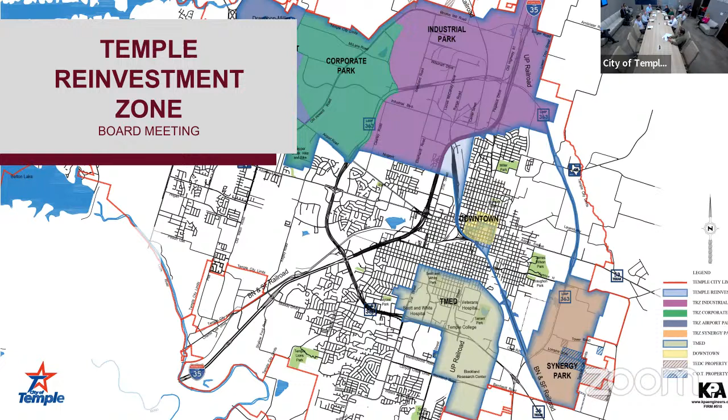So we have a PowerPoint presentation for 10 items. Just a little precursor: the financing chair, the project chair, and the chair worked with city staff over the last month, really working to get ready for this financing amendment. We reviewed all the projects, worked with our engineering staff, KPA, to work through all of the OPCs and any scope changes. I'm going to go through those—these are the 10 items.

For numbers 1 and 7, I'm going to have David from KPA give those presentations. On the outer loop change order, myself and Bob will be abstaining since we're working with one of the landowners there, just for conflict of interest. On number 7, the land for that detention pond is owned by the Bioscience District, and I believe Brian, myself, and Tyler will end up abstaining on that one too. So as you go through the agenda, you'll notice some lines dropped out so that we can abstain. On item number 1, we're going to have David talk about this change order.

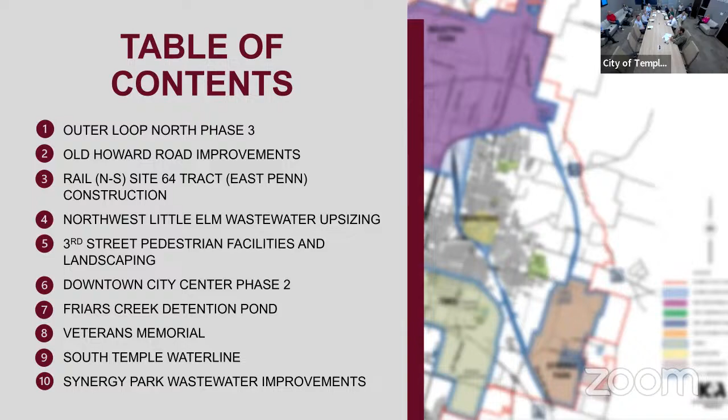Thank you, John. Good afternoon, everyone. I know most of you are pretty familiar with this project—it's been ongoing for a while. It's a signature project for the City of Temple: the closure of our outer loop on the north side, tying into I-35. We started this in 2013, so we're pushing 11 years now. One of the great things is we have a great contractor and we're moving very quickly. But with the North Industrial Park Master Plan we've done, there are some changes coming, reflected in the financing changes that Tracy has completed.

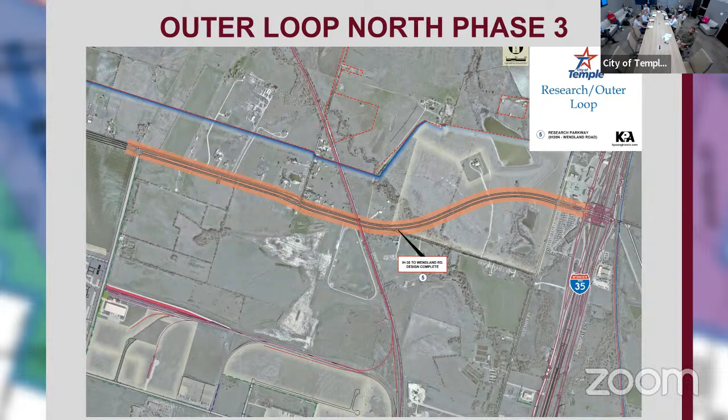If you recall, the North Industrial Park Master Plan has many elements to it, and this project was already designed and bid out prior to completing that master plan. This is going to sound like a lot of change order work, but keep in mind this is close to a $50 million project. You can see part of that North Industrial master plan up there, with a lot of retail space and improvements on areas that we own, so we will get increment off of that.

A few things we've done: we've developed a different turn lane and a two-way access around the BNSF on the east side of the road, as well as a full intersection at the future road heading north. Those have had some impacts to the projects that we will incorporate into this change order.

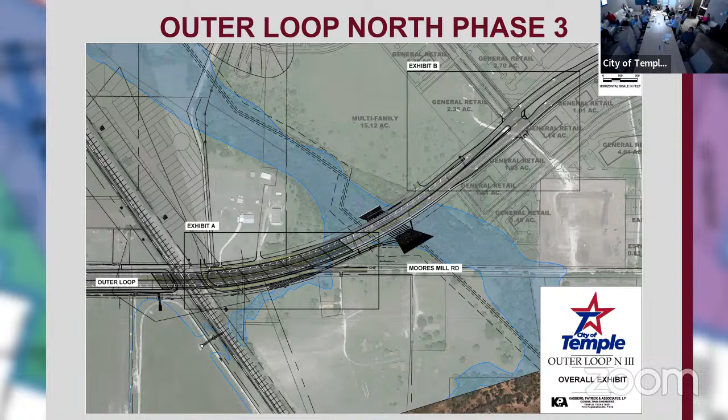That's a little closer look to it, where we can feed those areas and start to capture and build, and increment will be developed off of that.

It does affect the roadway section, the connection underneath the bridge around BNSF Railroad, and then we're going to tie back into Moores Mill Road because with that master plan we've developed some retail to the south. Things that we own and things we'll be able to get increment off of will feed our financing plan. A pretty large grading plan to the south as well, so we can get that more shovel ready, more attractive land, is also included within this change order.

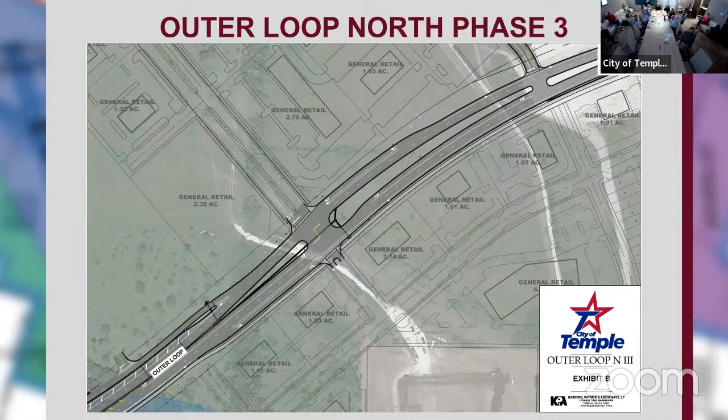And there's another look at it with the northern road and then a future park road that we'll zoom in on at this location. If you've ever been out there, and we encourage that you do, it's a beautiful site. There's an old SCS pond just to the north of that, that we've owned for quite some time.

So the city of Temple is looking at making that park space. In order to do that, we're going to make some adjustments to the property that has the access easement, as well as the water line that feeds to the north with the roadway that'll feed that future park, which will be an incredible facility for the city of Temple. That lake out there is just absolutely gorgeous. Very large fish in it too, just as an FYI. So that's part of this as well.

And then we've had several things that have popped up on the project. Pendleton Water Supply Corporation is in this area. We found several conflicts and have actually found several of their lines and showed Pendleton where those are located. So those things will be included in there.

We had at the beginning, before we bid the project, a permit from BNSF that was signed, sealed, and approved. It had gone through this board as well as council. They came back to us after we had bid the project and informed us that we needed to provide lights under the bridge. That's a fairly significant item, so that will be included in this change order.

And we've had a few dry utility issues, or conflicts I should say. We do find some rock out here, and so we've had some dry utilities—one of which was the fiber feeding Meta—that didn't meet their plans. They hit some rock and kind of decided to stop there. So we have to make some adjustments in order to make those two things fit together.

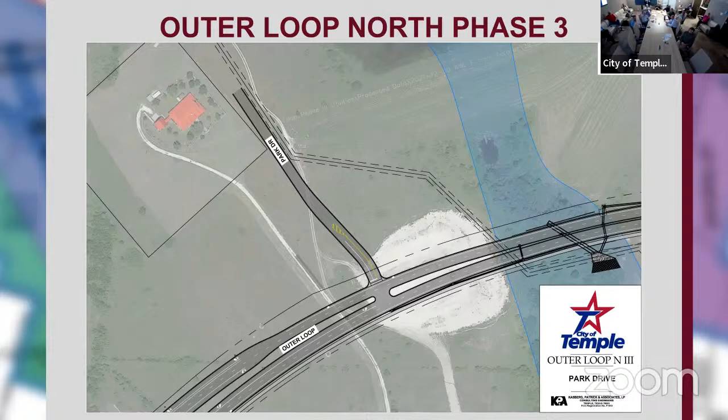And then we've also got some things happening on Hart Road with QT, and also to service the east side of Site 40, which is that site for water and wastewater. Again, all included in this. And these are items that we've been talking about for quite some time now.

So this is agenda item number 1 on your agenda today. We've had to do quite a bit of design in order to get this to a point where we can send this to the contractor for pricing. The good news is, like I said, it's a unit bid project, so a lot of it we've already got unit prices for, so we're just extending those units. But there are some new elements in here that we'll have to get pricing for.

We're still finalizing all of this, but we feel like that change order is going to be in the neighborhood of $3 million. Once we finalize that with the contractor, we'll be bringing it back to the committees and this board. But again, keep in mind, it's a $50 million job. So that is a big number, but in the scheme of things, it's not huge.

So you can see 46.5 right now for the construction funding, and that's a lot. The change order is going to be a lot as well, and we'll go through every item of it and bring that back to you. But for this item, I'd be happy to answer any questions about North Outer Loop. And right now, just so everybody remembers, this project currently—and it'll extend because of this change order—but currently is scheduled to complete at the end of April 2026.

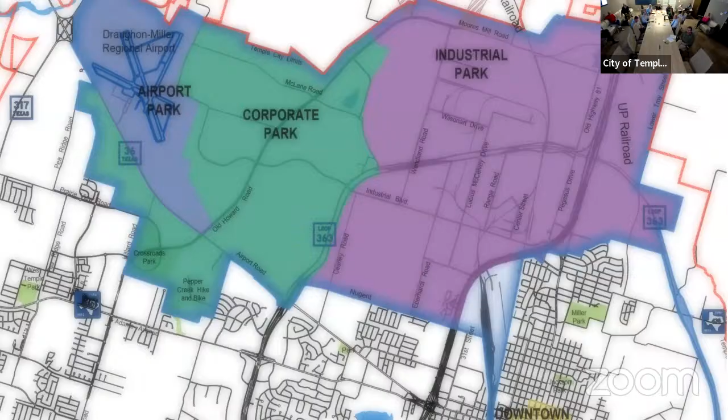Second item is the Old Howard Road. As you know, off the outer loop north, we bought a considerable amount of land. Most everything around this road, both on the east side and the west. There's just a couple tracks that we do not own, but basically everything that you can see there, we will be able to access.

A lot of the houses that you see on there have now been removed, taken down. We've got about 2 more to go, and all of the land and septics and everything are taken out so that we can certify these tracks. So the first thing we're gonna be doing is getting ready to get this thing going.

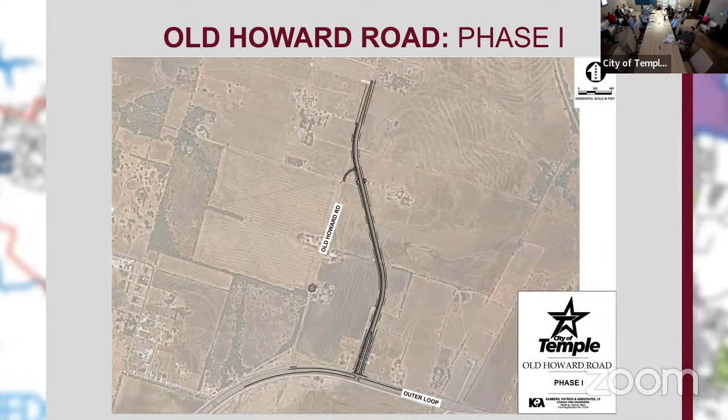If you look at the master plan, this is something maybe a lot of people haven't seen yet. In our master plan for the North Industrial and Logistics Park, we really have showcased a lot of nice entryways and some trees. From our original OPC, we have really updated and upgraded the road, making sure that it's a nice gateway into that, since we're gonna have close to 1,000 acres to the north. You can see we've sort of laid out how the buildings could go in here - a lot of 500,000 and 1,000,000 square foot warehouses or companies that we could put into this. And so that's really how we're wanting it to look.

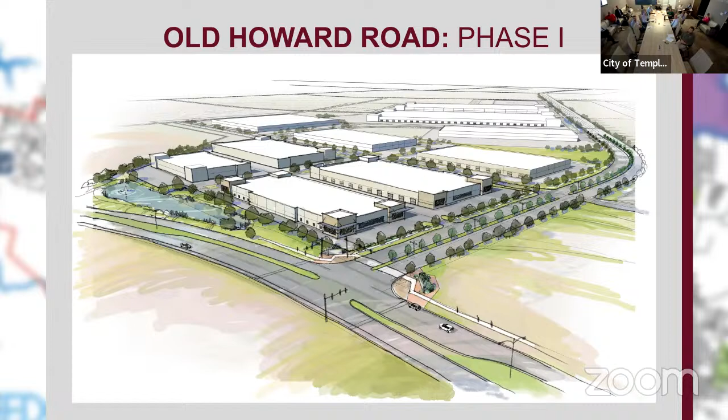Also in this project, we're making sure that we can have a unified drainage and not have a whole bunch of on-site drainage for each one. And so as David really dug into this and has looked at the drainage, he's updated some of those numbers. That way, when we have people come in, we can really offer them a shovel-ready site that they don't have to do on-site drainage for. And so we currently have for 2024...

787,900 for design, and for 2025, 1.2. The status of that is we're at 60% complete, and once we get this financing amendment and moving forward, we're hoping to get this project released in the next 3 to 4 months.

So we're hoping construction has gone up, and then for the financing plan, we're gonna have 3.344 in '24 and 9.606 in '25. Our construction admin number is 433,100, and fiscal '25 is 133,100. These numbers, as we present in the financing plan, will allow us to release this project.

Yeah, and just keep in mind that we are already in '25. For zone purposes, because it starts in October. So when we talk about the '24, that's where the original dollars were. And so we've already moved into 2025. Thank you. So is there any questions on that project?

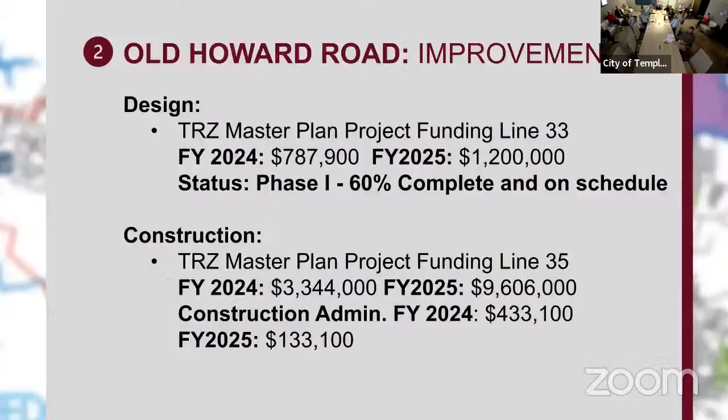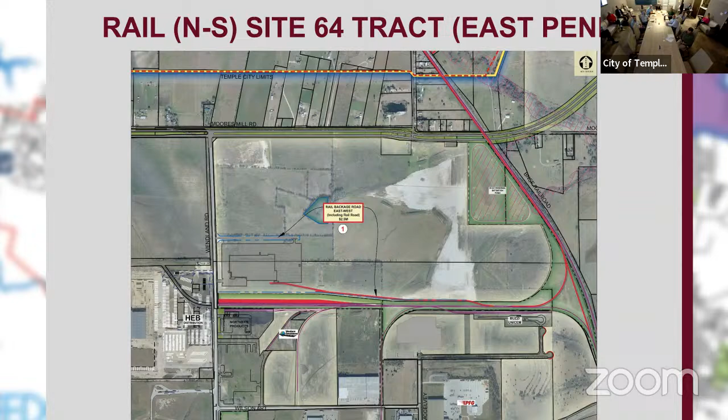The red box with an arrow down to it is a spur that will feed East Penn. We've known we were going to do East Penn. What happened with the announcement of SAIA, we've had to extend where we're tying into the main line of our own so that we can serve both East Penn and SAIA off of this switch.

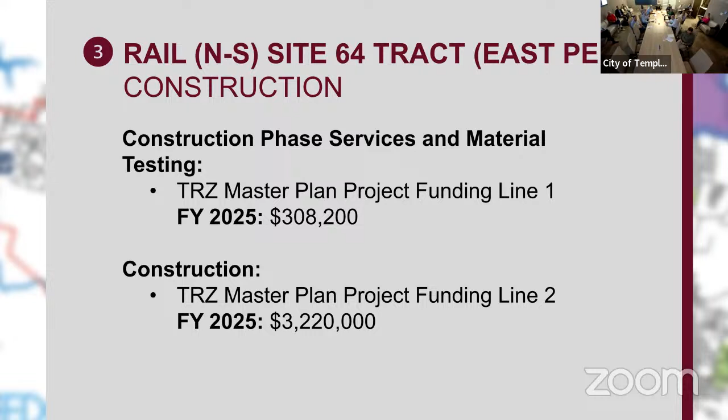And so that funding has gone up a little on the 2025, to 3.2. And our testing in construction services is 308,200. So again, this is just an updated OPC that reflects the change in scope to move this switch so that we can get SAIA and East Penn on the same line. Any questions there?

Next item is the sewer. This is a sewer line upgrade for Niagara. Long story short, Niagara had just a water system there at once, and most of that was used as warehouse. They had bought a 1,000,000 square foot warehouse over behind Buc-ee's and have converted that whole plant into production. So where they were just running water, now they have aseptic lines. Aseptic are power drinks, various types of drinks. So they've got 3 lines in there.

A bunch of us were able to tour that plant. Man, y'all, they've really done incredible amounts of work inside that building compared to what they had presented. They've learned a lot - this is their first aseptic line in the whole company. So they're doing those power drinks for HEB and for Walmart and for, I think, Costco too, some of the others. And so what had happened with this is they got a lot more wastewater going out.

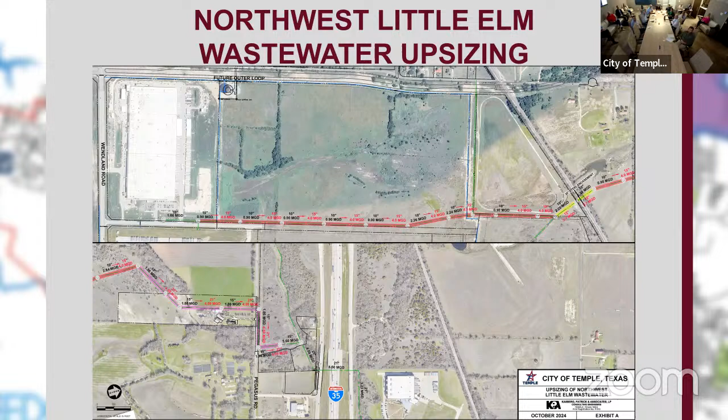So we're going to have to upgrade that line so that we can handle East Penn, SAIA, and we still have some additional lands in there. In this upgraded wastewater line, the zone is going to pick up costs.

932.3 out of the total OPC of 3 million. The city is using their own funds and working with Niagara to recover the rest, but we are suggesting to the group that we pick up 932,300 for this project and for doing the design at 367.7. Any questions on the sewer line?

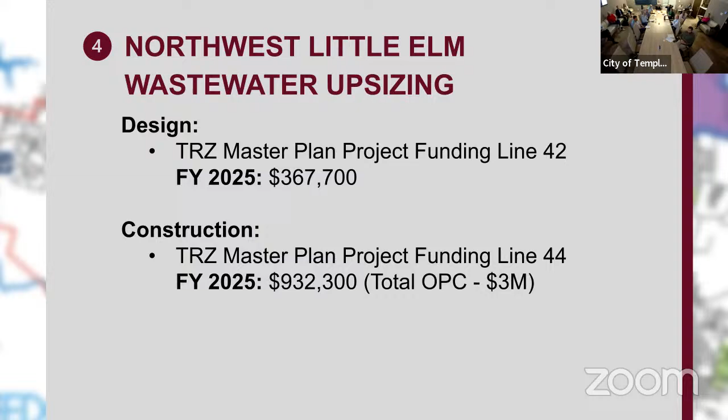Also gives us some pretty good capacity out there. Rather than just blowing the line and keeping it minimal, we're setting a new line in, which will give us a considerable amount of capacity that we'll be able to use even some of the north. So we've looked at how we'll be able to go north with some of this across the loop, giving us additional capacity, which will be good.

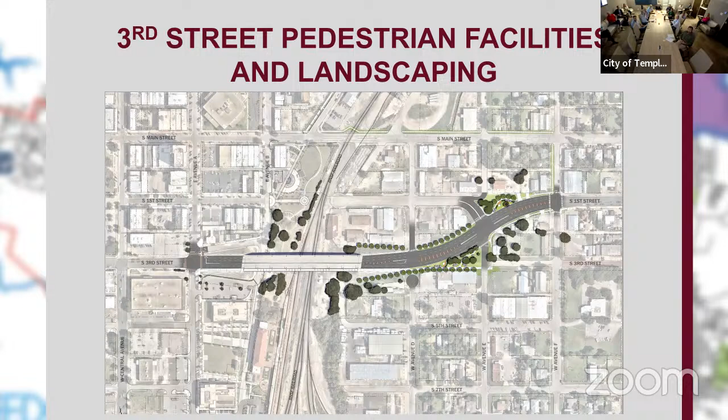Downtown, the 3rd Street pedestrian facilities landscaping is ready to bid. Plans are done. As you can tell, we're shutting a lane down on the overpass and going to where the old Encore was, shutting the street down so that we can start our movement.

We're really looking at coming from the other direction on Veterans Memorial Drive and 3rd Street and connecting in the middle here in the future. So this project will allow us to have a hike and bike lane over the top.

You can see it here at the old Encore site before. So where that tower is, everything to the right of that is the GISD's facility, nutrition in that, and so that was in their bond program, you all.

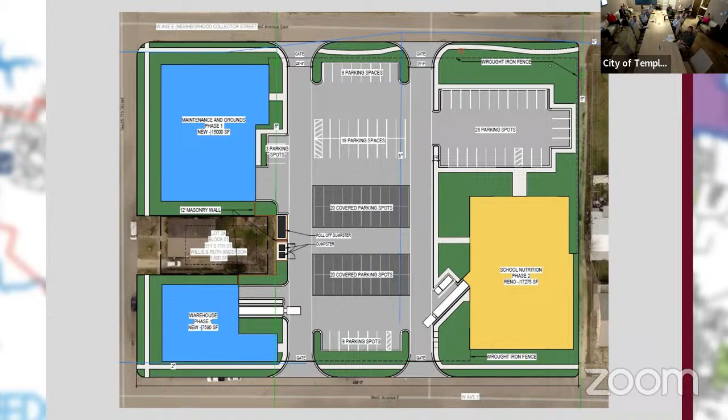And so David, this yellow section, we're going and helping them tie into this whole pedestrian facility. They have done their whole design, so I thought we would throw it in to show you. One of the things David had to do is he was working with MRB, the engineer for GISD on this project, to make sure that our project married up with theirs.

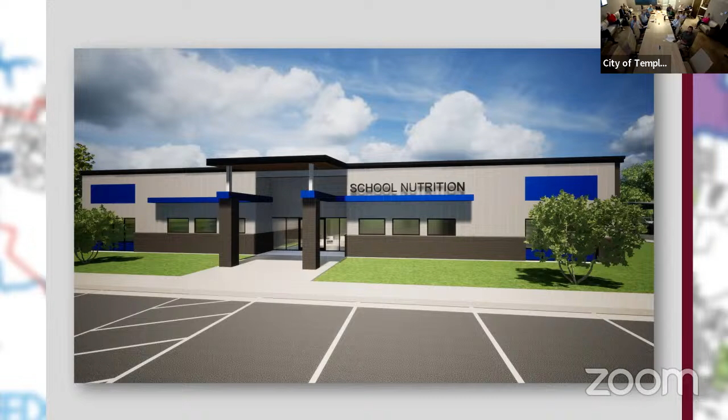But it's really going to help that quadrant. So we really are taking advantage of the money that the GISD is spending in that quarter to make sure that we have a nice presentation and tie it into our 3rd Street facility.

So that project, it didn't have a dollar change. It's at 74,714 for design, 4.6 for the construction, 260,000 for admin, and right of way for 205,762. This project is ready to bid, so we'll be seeing this go out by 1st of the year.

Any questions on that? Is that right of way already? I'm not sure we have any right of way. We've got to buy it. This was all in our original funding in case we needed any.

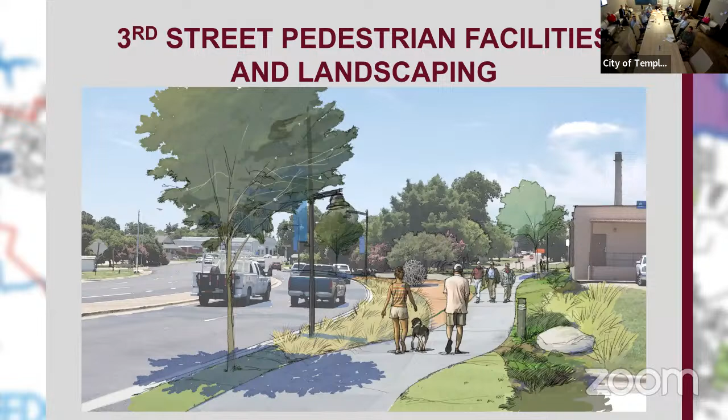Do we know if we need any? I remember looking at the triangle at one time. We were looking at the triangle one time, but I think you guys had separately acquired a piece of that, and we can get the project done.

See that middle triangle? We have those funds, we have not acquired that. If you look at that bottom little triangle, we don't own that. We really thought we should be looking at that. The top triangle to the right side, we are doing, but not the lower one.

And so we put dollars in there for right of way, and it's good to have in there if we do bump into anything as we do this project. So that triangle's not going to happen in this project.

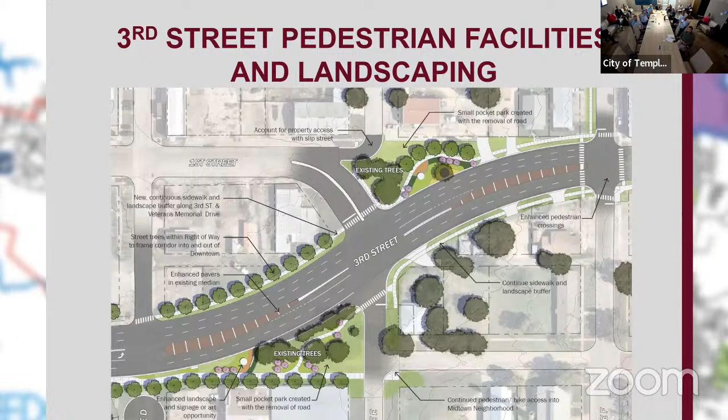See that these two are. You can see it, kind of wish I had a pointer, you can't point on that, but right under 1st Street, that's the triangle that we think at some particular point would be nice to acquire.

It's just a bunch of slabs down there, and so it's a gateway into downtown. And so this was a drawing we had all looked at saying we should attempt to do that, we probably should still attempt to do that.

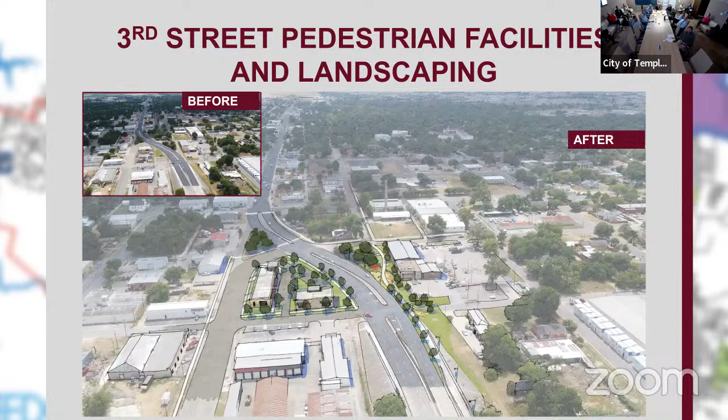We did acquire half of it, and the other half is on the market, so if you give me a green light, I will go get it right now. Is it more than that 250? A little bit, but not much. What's a little? What's a little bit?

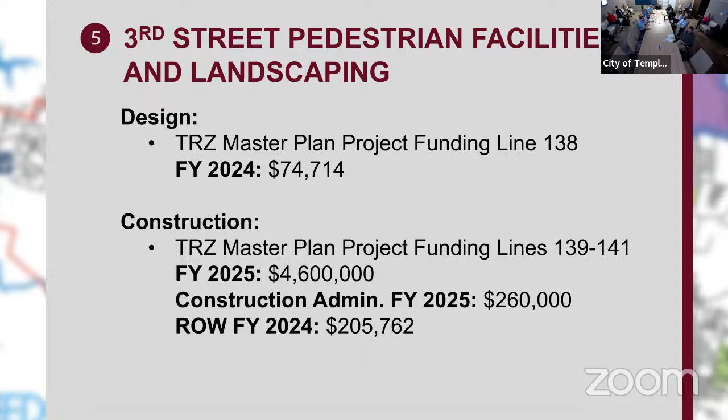That's also on a real estate deal, so that would be a good thing to look at, seeing if we could acquire. We really would like to do that, Gateway.

Downtown city center, again, it's a change order. We're really moving, because every time they move 100 feet, they find another tank in the ground, David. So most of this change order is to do with that, right? We have a few items in there now. Yeah, go over those for me. I was looking at this and it's a moving target for me.

And then the subsequent issue is you've got a big hole where you're about to put a road. So things we did not anticipate having to backfill and compact and make stable so we can construct a road, we then have to do. So that's one of the issues. We also found a fire hydrant with a seal leaking, so we've replaced that. That's one of our items.

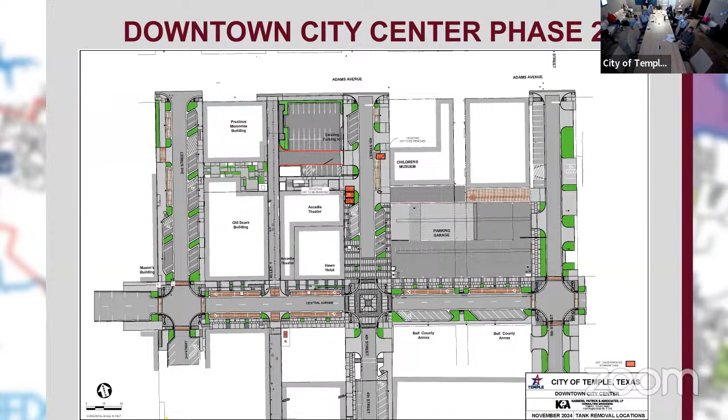So quite a bit of stuff, and some of it's a bit of a catch-up, especially with those underground storage tanks - it's not something you can just leave there. It would completely shut that project down. So there are 2 items on this: agenda item 7 and agenda item 10. One is the $58,000 for all of those tank removals, and then the change order for the items I just talked about. Happy to answer any questions on this.

Getting really close to being probably the last of the change orders on this, wouldn't you think? Close - for the current scope of work, I believe so, yes. It's looking good. Any questions on downtown city center?

So for where we had to lower the line, versus having them put in a lift station?

Was that just agreed to prior, or versus just telling them they had to put in a lift station? Yeah, I think it's a bit of a chicken and egg situation. They were still in design and their MEP gave us a location to hit. You may recall they had a basement in that facility, and at one time they were going to have a pump to pump that up.

So when we did the first phase of this and had to get those utilities in so they could go to work, we put it at the elevation they thought they'd be at. Once they actually got to their final design, it was considerably lower. Of course, that's gravity, so we then have to lower it, and the only way to do that is all the way back to the main.

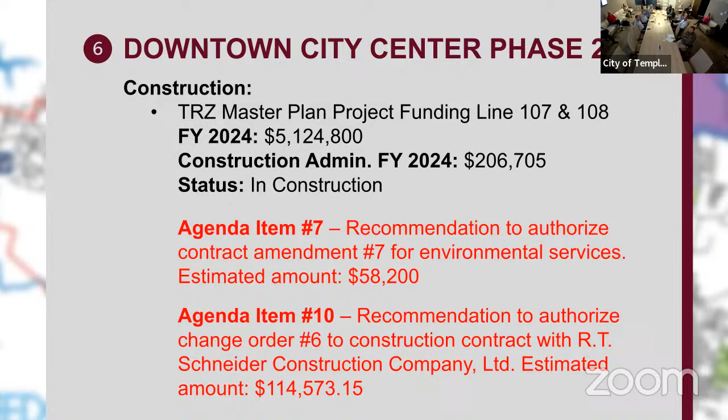These downtown projects are like that. Every single project, every single street we've done - we still got all of Avenue A and just a ton. They're a lot of fun - power, water, sewer, drainage - they're tough projects, really. Any questions on that at all?

No? Okay, the Friars Creek Detention Pond. If you recall, this is in conjunction with our Veterans Memorial Boulevard project. In order to raise those drains to city and TxDOT standards, detention is required. Veterans Memorial comes down towards Temple College, and all that drainage is fed to Friars Creek via the concrete-lined channel that runs through Temple College.

In the projects we're designing right now, first phase will be released in 2025. We are upgrading those facilities so they can handle the 25-year storm for the roadway and the 100-year storm for cross drainage. The two boxes we're talking about - that's owned by the Bioscience District, just for reference, both the red box and the green box.

So anyway, one of the solutions to that, and we looked at many locations, our solution is to do stormwater detention. We've gone through several scenarios to look at our best options, because Friars Creek has mostly been built out all around it, so we're limited on where we can put a detention pond that will serve that stormwater.

This was our best option - the green and purple right now is one holistic tract owned by the Bioscience District. The design takes the eastern portion of that to develop a detention pond so we can accept that stormwater through the concrete-lined channel, detain it, and not increase the flooding. There is quite a bit of flooding happening on Friars Creek, but this will actually decrease that flooding and reduce the floodplain.

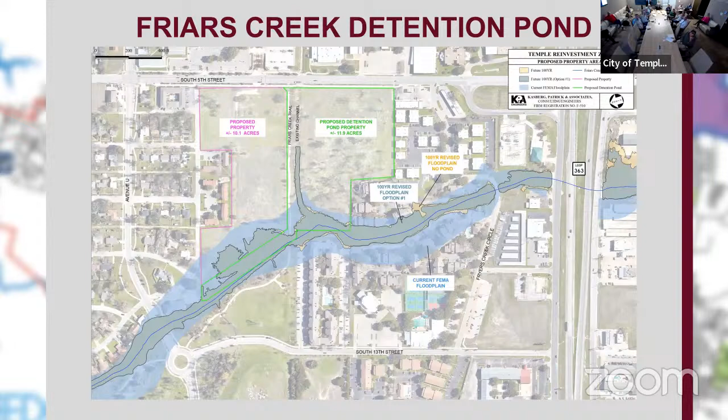And that's why I gave you this one, so you can get a pretty good picture about what that looks like on that whole green area. We're using that entire green area in order to develop that, and so we need a large area, which gets us to those numbers. I'd be happy to answer any questions on this one.

Next one, the reason they're doing the detention pond is so that we can move ahead on Veterans Memorial from the Temple College Apartments out to Avenue O. We've got this in really 3 segments: apartments to Avenue U is one segment, the next is Avenue U to R, and then R to O.

We might not make it all the way to O. We are doing this project with grant funding that Bryn and the staff have been able to get, so it's been 2 different grants. This is fully funded by grant funding and non-increment money, and so it's really good for Temple, Texas to be able to get this done without using an increment.

And so we've got sort of a timing issue to get this done. That first grant has got to be released and started by 9/25. So David is really pushing hard to get KPA's portion done. TxDOT will be in charge of that, so it'll take some effort. And then the second grant, we will definitely be able to get U to R, and then we'll use the per-unit bid numbers when they come in to see how far we can make it to O, because we don't want to leave any of the dollars on the table.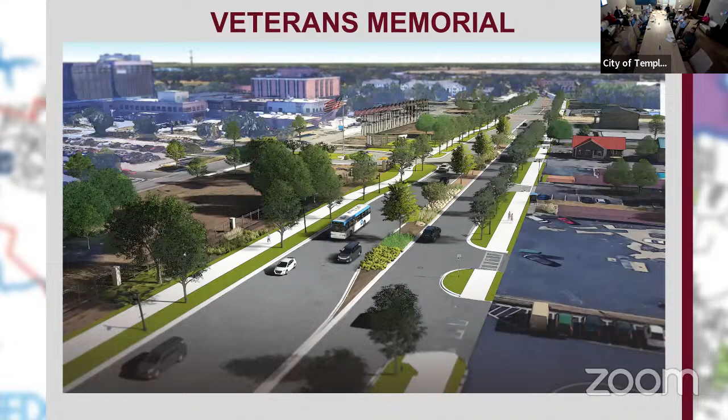Well, all the land in front of the VA, they have given us easements so that we can do this. You cannot buy property from the United States government, but they allow us to use an easement. So I don't know, 5 years ago, 6 years ago, we got John Carter and others to work with the government to allow us to get that easement so that we can take our curb and gutter all the way up to the right of way line and then use their property for the hike and bike trail. That really helped us get this project done.

So again, real important to emphasize the fact that it's 20 million grant, non-increment funding. This is real good. You can look at the bottom line, that right now we're projecting this to be 19,342,000. So we got some dollars there left over to be used on other parts of this project.

So that first grant is on the TC to Avenue U, which is 9 million. Construction's 8,837,000. You've got 545,000 in construction admin and right of way for 100,000.

So that's the first project we're going to be trying to kick off here by 9/25, and then directly following that, as soon as David can get it all together and get those first 2 projects released, we'll go Avenue U to as far as O as we can, and those are again in the 2 funding categories. So it's 8.715 million, construction's 8,545,000, admin 150,000, right of way. And again, that last piece, we think we'll pick up the remaining dollars that we have on the table.

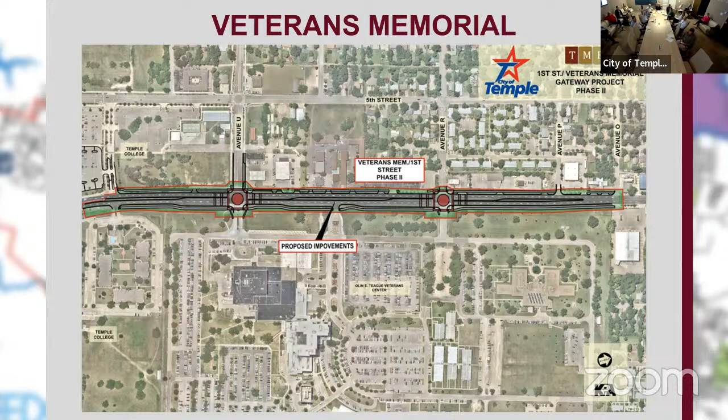Any questions on that? Good project, really.

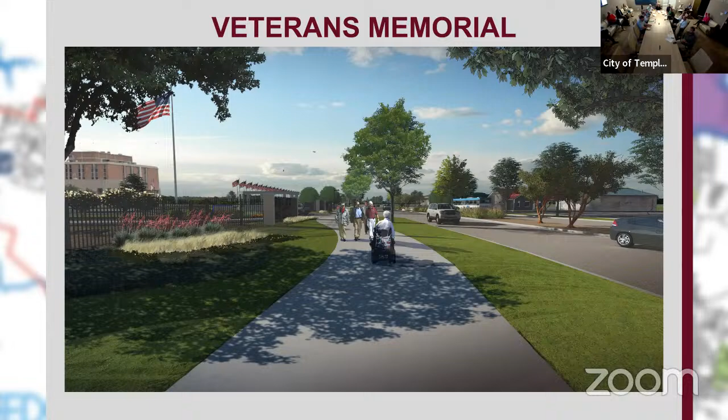I think this thing is like 10 years old, Steve - a 12-year-old project. Over the years we've had this and we've worked on it. It is an old project, so it's really exciting to actually get this in the financing plan with a pathway to get it done. And again, as you know, we're coming the other direction on our 3rd Street. So at some point it'll be nice to connect the two and have that part looking like this all the way down to downtown. It's a pretty good corridor, especially because it connects with I-14. So that's a good project.

Another project we picked up about 2 to 2.5 years ago is the transmission line that'll come from the left-hand side, which is our water plant, bringing it into the southeast quadrant. Eventually we'll be connecting to a water tower at the new TISD building on Blackland - that's really where we're going. We've got one section already in the ground that the zone has done from 5th Street to 31st, so that section to the left where you don't see it is in the ground getting ready to be tested.

Next one we're going to do is the purple. If you look at this purple, you can route that all on the Georgetown Railroad using Shallow Ford Road. Then we're going to have to pick up the red and the blue, which is a little more difficult on right-of-ways - it mirrors the existing transmission line that runs through there, so most of that line will be paralleling an existing transmission line. As you know, they've upgraded the water plant there to make more water, so it's just sitting there, we're ready to use it. We just have to get it transmitted over to the southeast.

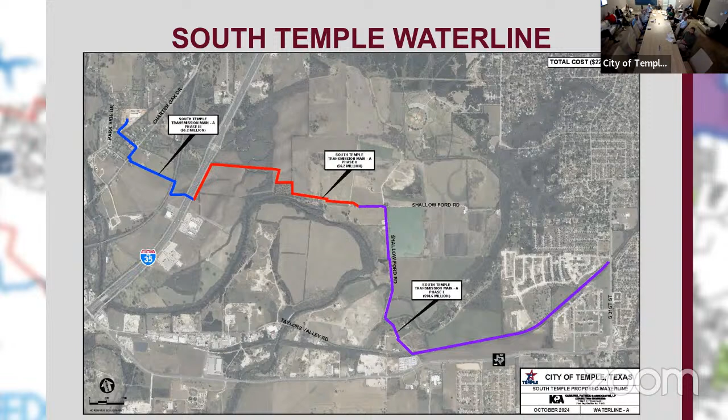It's a huge project, going to take a long time to get that in the ground, get it done. But once you do that, it will really feed all of the southeast, all our growth into our Synergy Park, and really that whole area, any expansion we want to do into that corridor. Any questions on it?

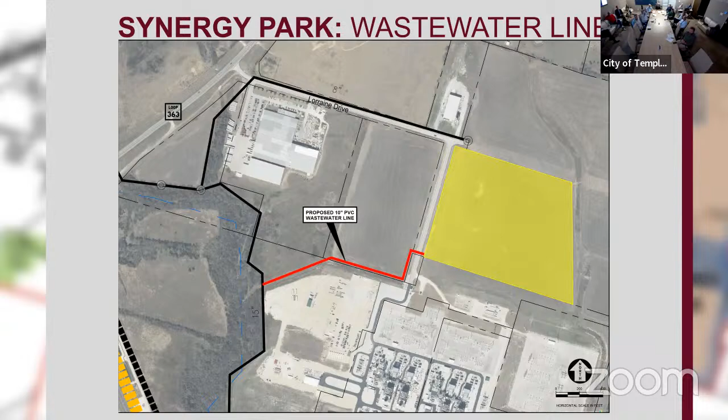Last item is this wastewater line. It is bid and we're voting on releasing that bid, correct? This is a real important one. That red sewer line, we own all the right of way, so we didn't need right of way. We had this on the project list, I guess, for a year and a half.

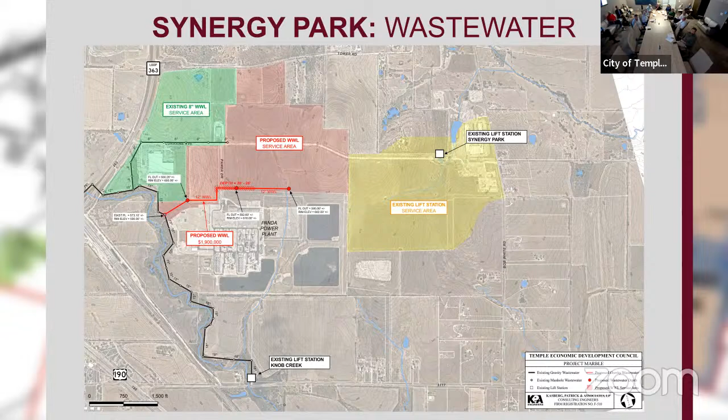We have been able to buy some additional properties to the north there. So all of that pink or light red color is lands that we own. So we had David relook at it to make sure that all the properties we had in this corridor, we could go ahead and serve. And so this is the actual bid that came in, and really it's been good because we picked up some dollars on that.

So we had 905,078 estimated amount. That's cheap, and that's what our financing plan was - the 905,078. And the recommendation, the authorized construction, is 631,777, with 100,500 for KPA to do construction phase services.

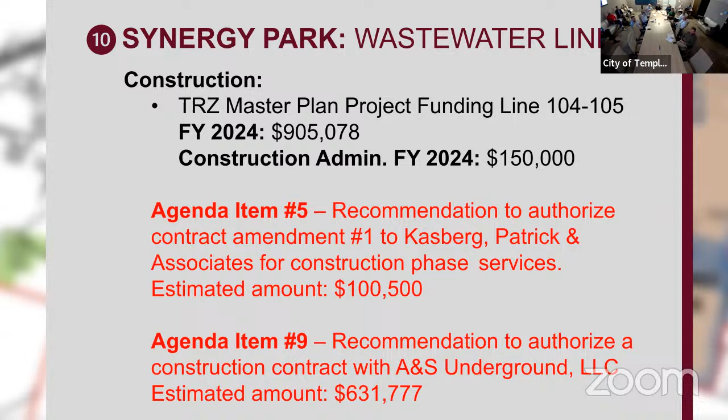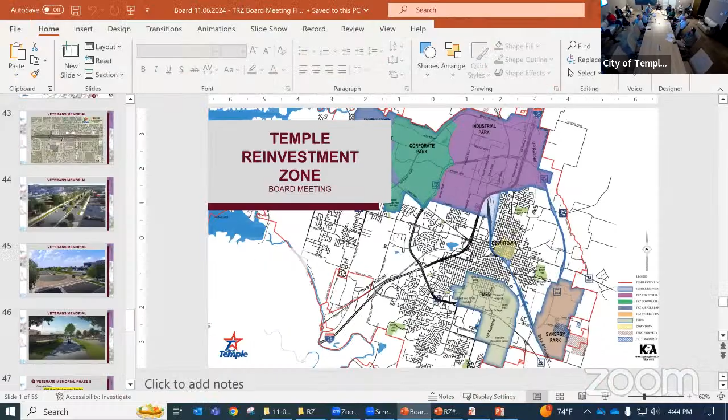And if there's no questions on any of those, what we're going to do now is take all these projects and figure out how to put them into our financing plan and fund it. That means that goes to Tracy. Tracy can go through the presentation. I can jump in when needed, so feel free to ask any questions.

But before she gets started, we have met as a group, as John alluded to, we met as a financing plan and project planning committee last week. And then Tracy and Melissa and I have had bunches of meetings with David to make sure our OPCs are the right numbers, and the numbers in this financing plan are as accurate as we can get them, so we don't have any surprises. And the surprises we do have, hopefully, are found.

So, Tracy, yes, question - opinion cost, opinion of probable cost. I was about to say that because I know other board members when they come on, it's like, what are y'all talking about? Yeah, and just we try - like when John said he wasn't the lowest bidder - we don't want David to be low and then the bids come in higher, because then we have to find the money in our finance plan to allocate. So it's the engineer's estimate before it goes to bid.

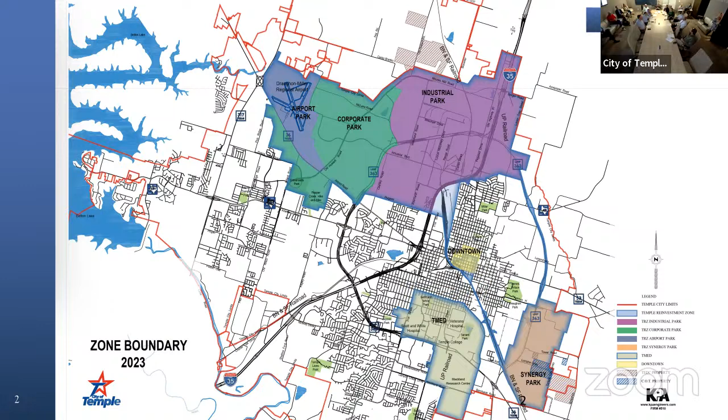So we're working off of that to try to put that into our budget for budgeting purposes, and then it goes to bid, and sometimes they're higher, sometimes they're lower. It's always nice when we are able to capture someone lower. And so we say, got a $1 million project and we bid it for 750, that gives us in our financing plan $250,000 that they have to reallocate.

Okay, I have a lot of numbers to go over. I'm going to go over them pretty fast at a high level. We've dug into them really deep, but if you need to stop me to go back and ask questions, please do.

Each year, the process of when we're getting ready for an amendment, usually September, or sometimes October or November, we receive the certified values from the appraisal district, usually certified in July. We go through those, review them, and look at how the project committee and finance committee worked hard together to make sure our projects align, the funding aligns with when the project's ready to bid, ready to build. We also continue to update the project cost estimates, the OPCs, look at the master plan for project listings, and funding for concept design and project visioning.